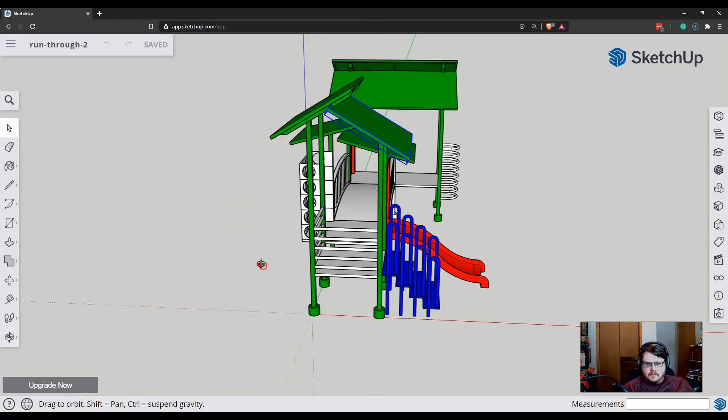This will be 3 or 4 videos, and we'll be building another playground equipment. This time there's quite a bit more detail, with some interesting new features and more detail underneath the roof. I hope you find this interesting.

Let's begin from the beginning. We'll create a new file, delete the helper person, and we'll call this Playground 2.

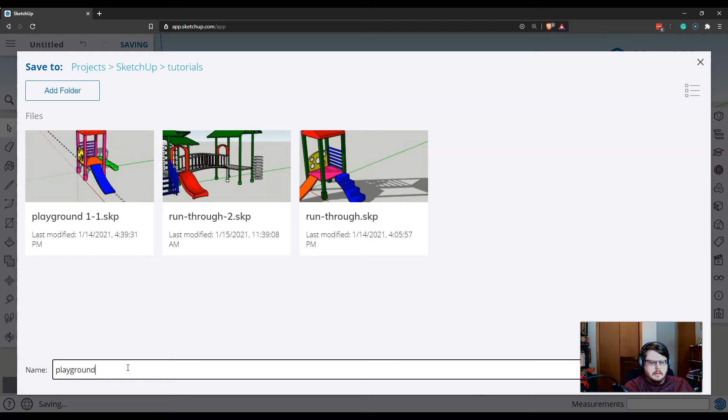I'm going to put 2-1 because I'm going to make multiple copies of this file.

Alright, to begin, remember that we like to make components of everything. So the whole idea, the whole philosophy behind SketchUp is to start with simple, primitive shapes and then build more complex geometry from them. So we'll start with a rectangle.

You just start at the origin, draw out till you see it, and we're going to make this 3 inches, comma 3 inches. In the bottom right hand corner you can see my measurement box, and I put 3, comma 3. Remember, our default unit is inches, so whenever you just type a number, it'll automatically assume it's inches.

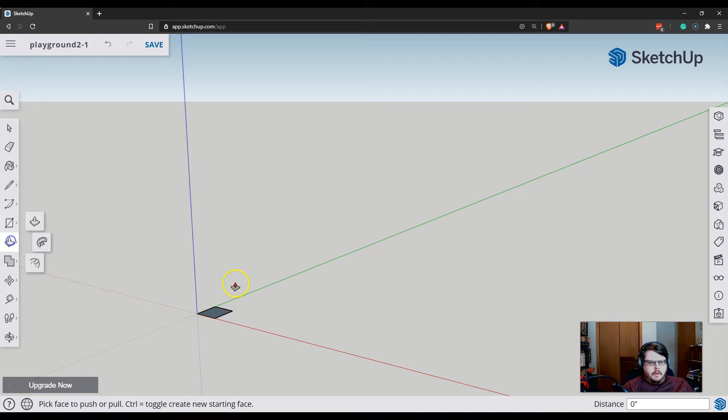We're going to take these pillars and extrude them out with the push-pull tool to 12 feet. These will be the pillars that form the playground.

Take the select tool, triple click this, right click it, and make it a component. We'll call it a pillar.

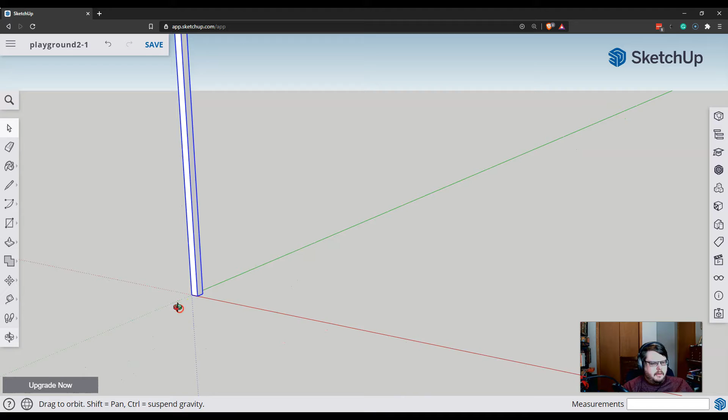Now we want to make these about 4 feet apart, so we'll grab one with the move tool. The hotkey for the move tool is M. The way I usually do this is with one hand on the mouse and one hand on the keyboard, hitting various hotkeys as I work, so I can swap between tools quickly. I'll click on this corner, start moving it on the red axis, then hit control so that it's duplicated, and type 4 apostrophe enter.

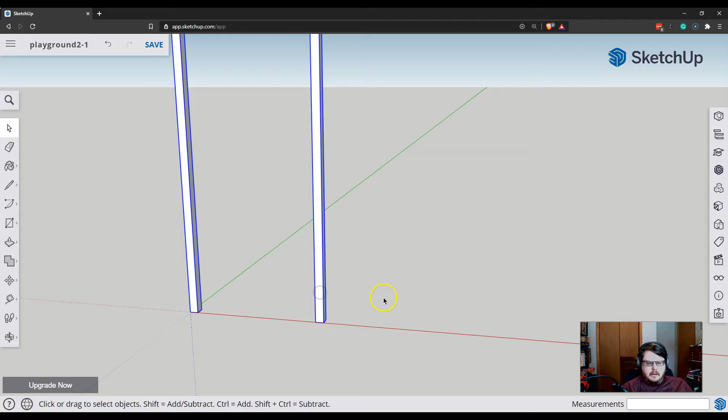Now we'll take that again, click it, select both of them, click on the move tool, click on the corner, start moving them both in the green axis, hit control to duplicate, and get 4 feet again. Then one final time: click it, move it in the green direction, hit control to duplicate, 4 feet. Now we have 6 columns with which to begin our playground.

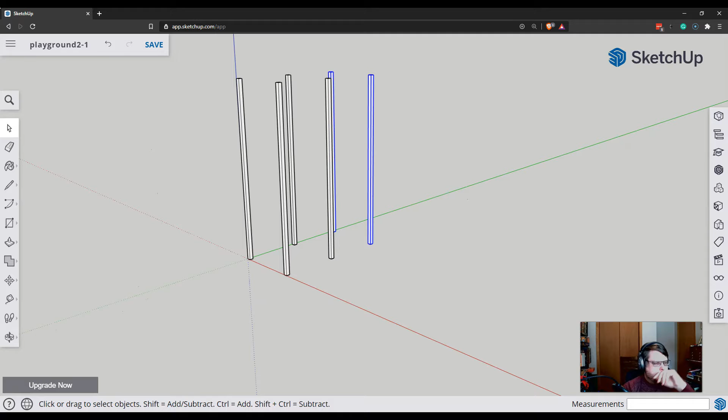Now the next part, we're going to build the platform. This will be very similar to what we did in the first one. You create a rectangle of any size underneath on the base, and then we'll push-pull it up 2 inches.

Then we will bring it up with the select tool, triple click it, and make it a component. We'll call it a platform.

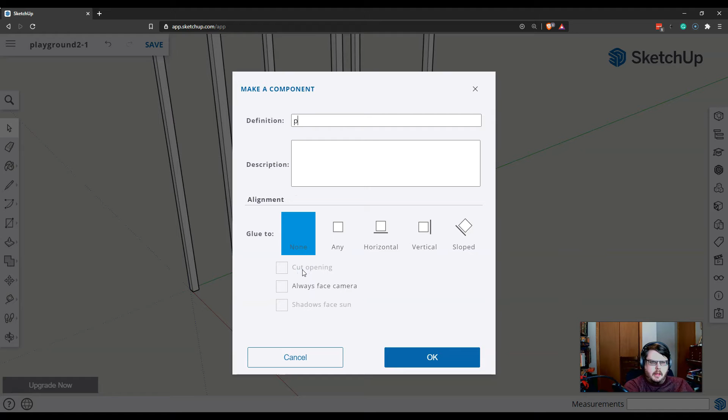We'll move it in the blue direction up 30 inches. You can use any dimensions you like, whatever makes sense to you. Your end result does not have to look exactly like what I'm creating, so you can use different results if you like.

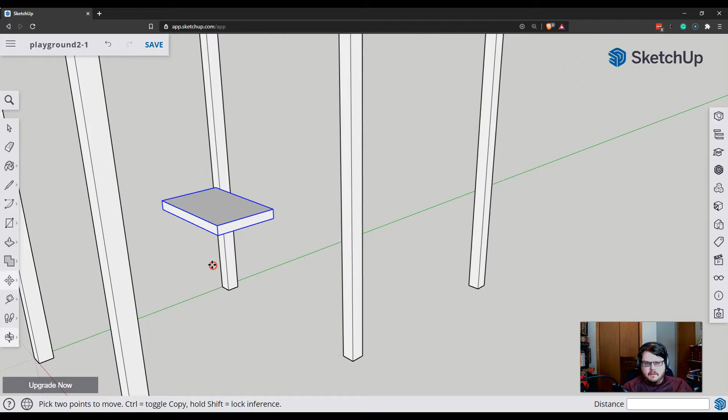It should have about the same level of detail though. So we'll grab the select tool and enter this component, the platform component. Notice how everything else kind of grays out. We'll use the push-pull tool to...

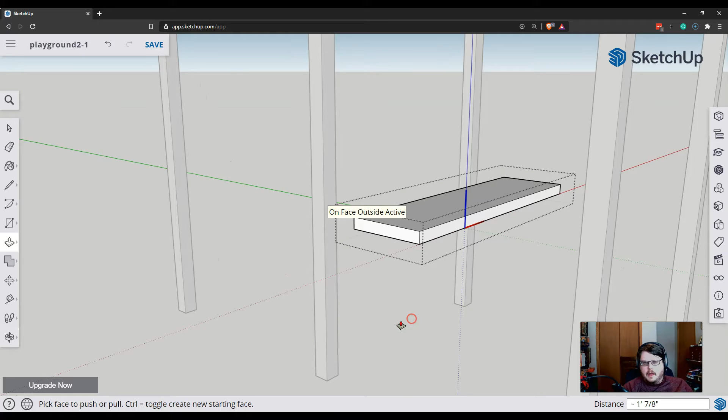Grab this edge and infer to the outside of this pillar, and then on the opposite face, once again, we'll do the same thing. For the other 2 faces, we'll push-pull but infer to the inside of the face. This is exactly like what we did in the last one. So infer to this side of the face, and that way, on this side...

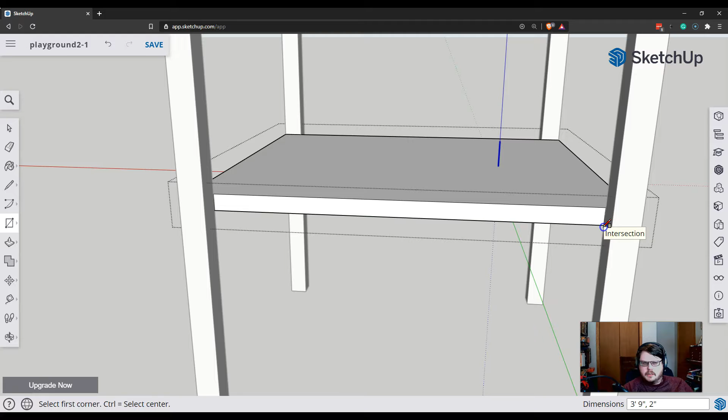When we cut out a chunk here, remember you could use lines, but that would be a 4-click operation. It's easier to take the rectangle tool, click on that intersection, drag over to this intersection, click, and then you'll have your new geometry. If I take the push-pull tool, you'll see that it cuts it away. And if I hide the rest of the model, you can see that those lines are there.

By the way, I'll show you how to hide the rest of the model here in another one. Actually, this is a good time to show it off. This is what I do.

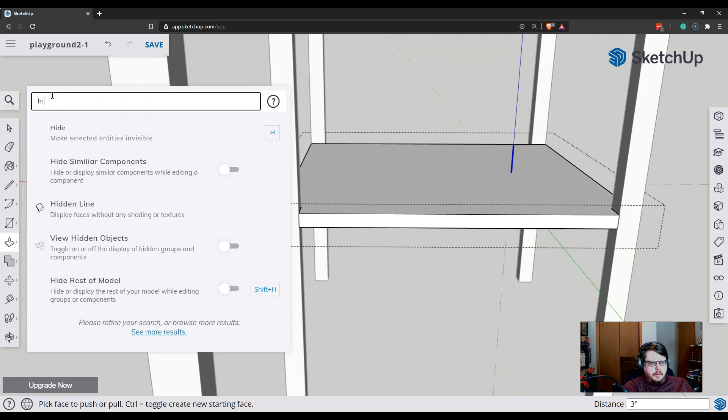With the search tool, I type the word hide, and you get a bunch of hide-related tools. This is what I do: I have H set to hide something that's selected, and Shift H to hide everything but what you're working on. So if you're in a component, you hit Shift H and it gets rid of everything.

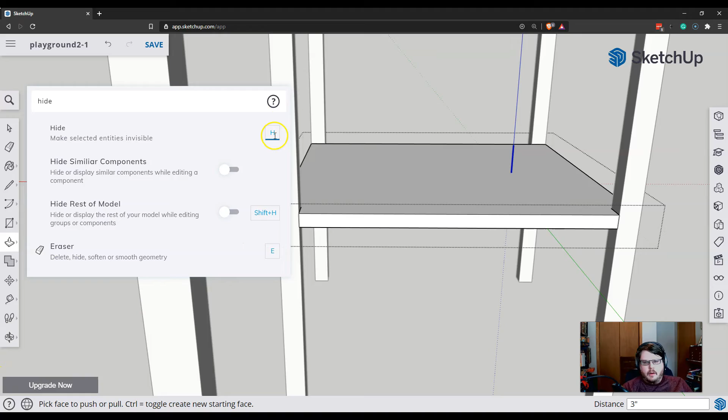You can change these shortcuts by clicking on these little boxes. I believe H is set to some other tool that you'd never click on or use, except automatically, like using the middle mouse button to orbit. I think it's set to one of those, so I always remap it to hide H and Shift H.

So you can do it here too—just hide and Shift hide. I have never actually used this feature, hide similar components. Not really sure what that's about.

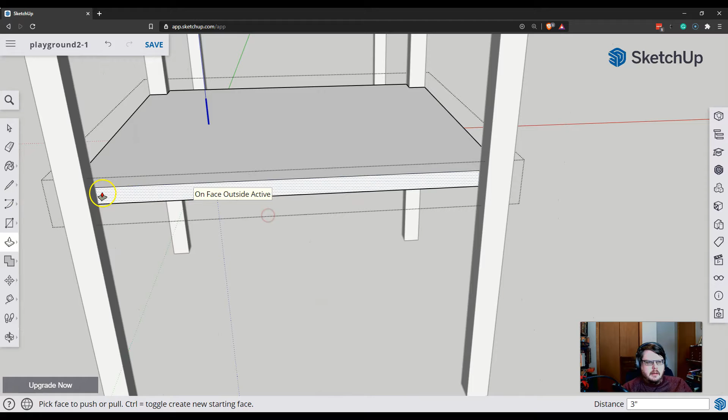We'll move around here to the other side. You need the other geometry there to do these inferences, but there we go. Push pull—P is the keyboard shortcut for push pull. If you ever want to know what a keyboard shortcut is, you can type push pull and you'll see that the shortcut is P.

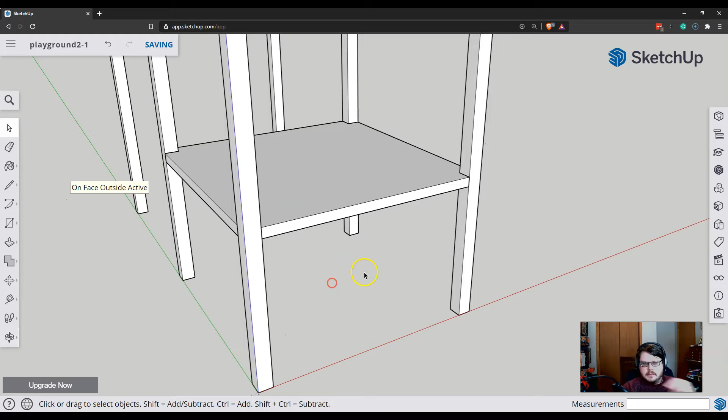The ability to map keys to the keyboard is actually a really new feature in the free version of SketchUp, and I'm quite pleased that they did it.

All right, moving along. So this is now a component—the platform is a component. Let's duplicate it.

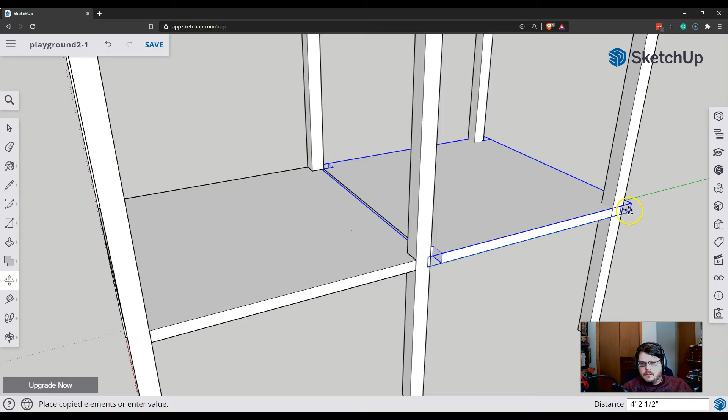Remember, when you're going to move stuff, you want to use logical inference points. Since it's already componentized, I'll grab it from this corner, start moving in the green direction, hit Control to duplicate it, and infer to the outside edge of that pillar. Then we'll grab it again and move it up in the blue direction, maybe about 6 inches.

Finally, we will add some feet to our pillars. We'll double click to get inside one of the components—everything else gets grayed out. Now we'll grab the circle tool. Check this out: if I mouse over this midpoint here for a couple seconds, and then mouse over this other midpoint for a couple seconds...

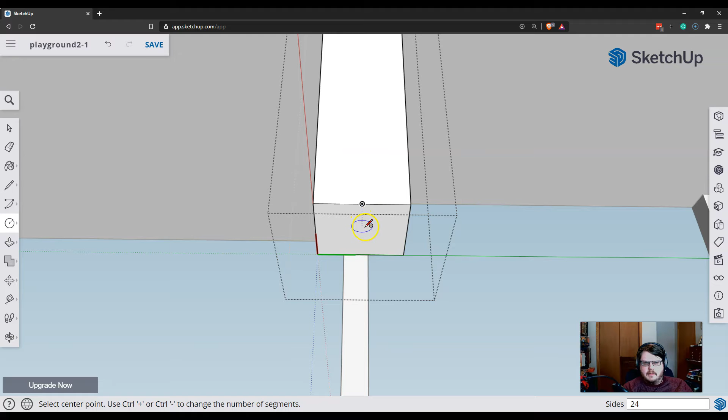It'll allow me to infer to both of them—or it did before. Kind of irritated that it's not working now. Alright, whatever, I'll use the tape measure.

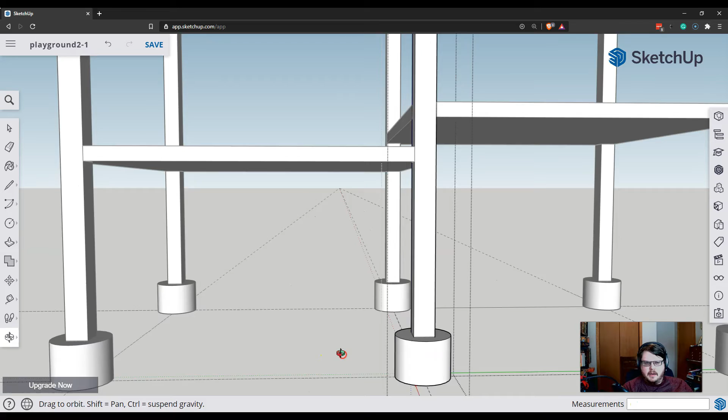We'll grab from here to here, and from here to here, and then we've got our midpoint. Circle tool, grab it, pull it out about 4 inches—a 4-inch circle radius. Push pull, and we'll push it up, say, 6 inches. You'll notice that since it's a component, it has propagated those changes to all of the other models.

Save and exit out of our thing. And we'll go back into the eyeglasses thing, delete all of our guides, and then close this up again.

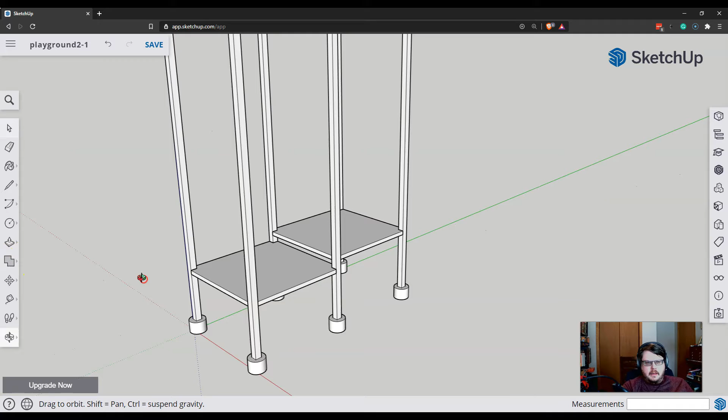All right, for the last part of this video, we will build our roof. It would be cool if we could build your roof in place, but I think it might be easier if we have a version of it out here that we can mess with, and then have the roofs sitting up here in their own space. So let's start right here.

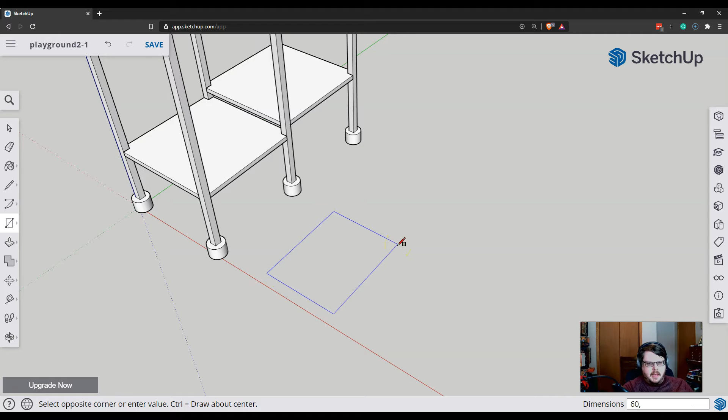Start with a rectangle—the rectangle tool is here—and we'll build the roof. We'll make it 60 inches by 80 inches. So a rectangle that's 60 by 80, and then we'll pull it up 2 inches with push pull. Then we'll make it a component: make component, roof. Now this is how we're going to make this really easy to do.

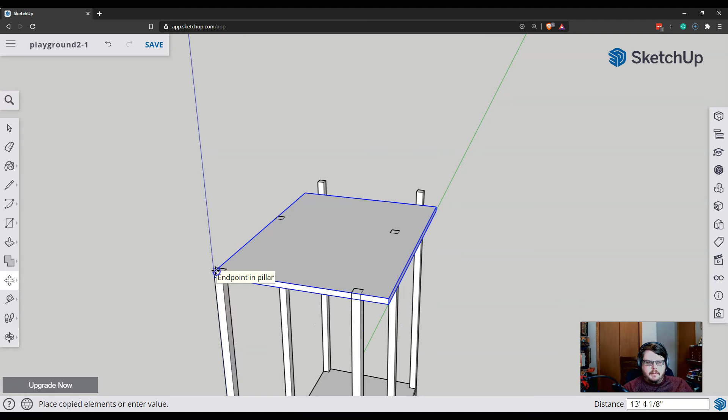We're going to pick it up and hit Control to duplicate it, then get it up on top of the roof. Now we're going to fine tune its positioning—pull it a little bit this way, pull it a little bit this way.

If you mouse over it, you'll find this little red plus sign right here, and you'll notice the protractor appears over here. That means you can rotate it by grabbing these handles. So if I click on that plus, I can rotate it up to a nice angle.

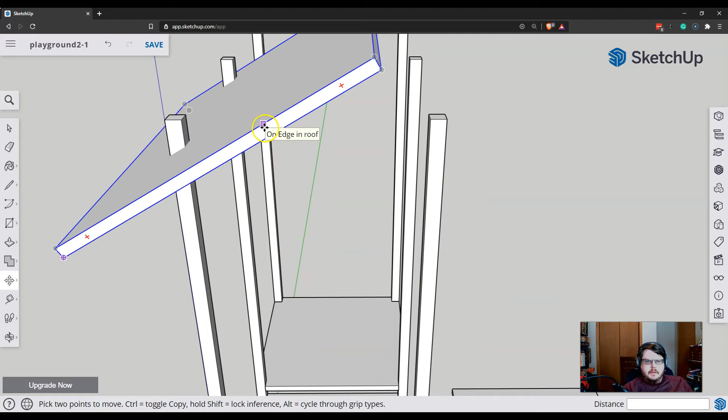Then we'll duplicate it again in this direction, in the red direction, and rotate this one around so it's kind of an opposite angle, then move it in the blue direction, move it down, and maybe out some more in the red direction. Try to keep it locked on the various axes.

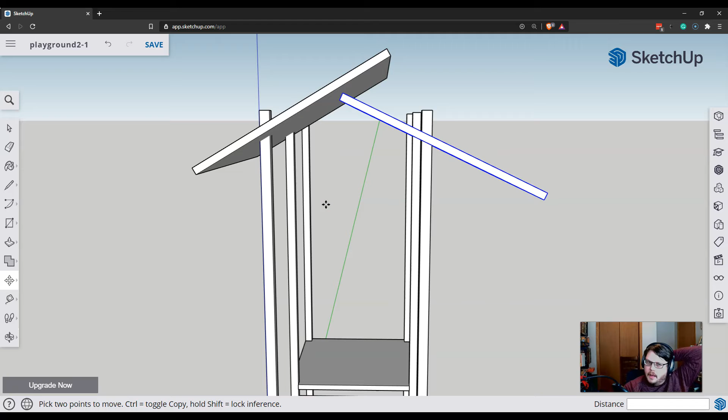Don't let it go off in some weird direction. If this line I'm dragging out here is black, that means you're going off in some weird random direction. So whenever you pick it up, if you accidentally move it randomly, undo that and remove it.

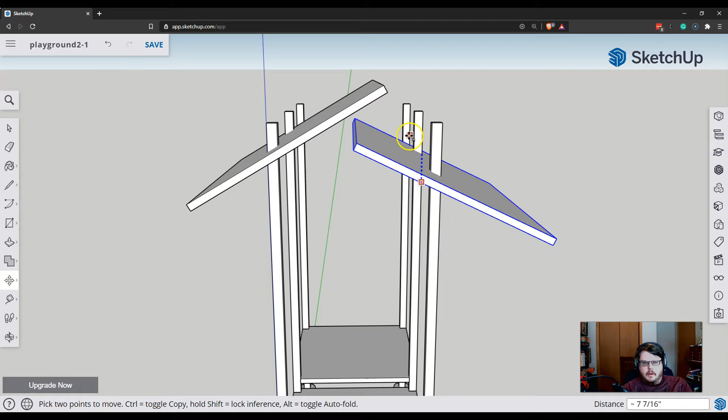You can always move it back into position by inferring to some other geometry. Let's move it down—wait, not down, let's move it in the red direction. Let's move this one down just a little bit more, and a little bit more. Boom, okay, so there's our two roofs, our first two roofs.

And now here's what we want to do.

So these are all components, and they're all going to be exactly the same. Don't worry if the posts are sticking out, that's by design, we'll fix that later. So let's edit this one.

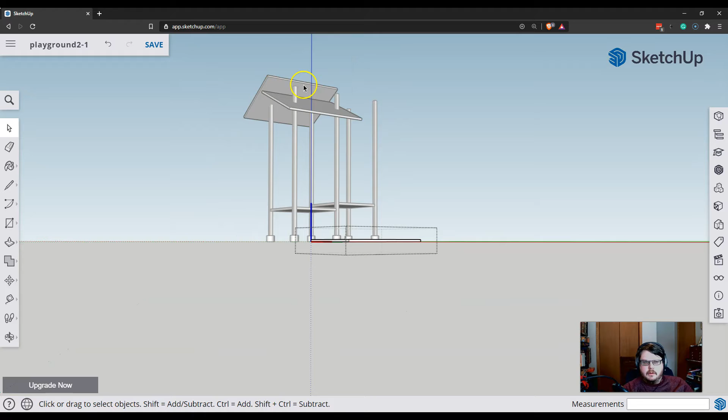First, triple click or double click to get into it, and we'll leave those ones up there. Now we want to add some support structures on them. It would be cool to work on the bottom side, but let's just flip it over so we don't have to worry about that.

So we'll use the rotate tool and rotate it about the blue axis, rotate it 180 degrees, and there we go.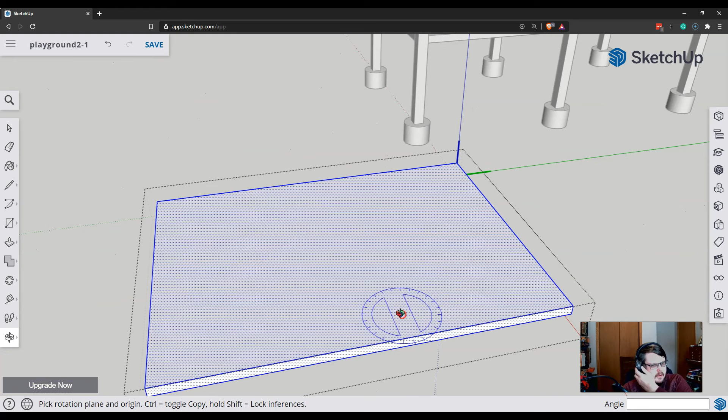And so we will edit the component, and do an offset on this bottom face. I flipped it over, we'll offset it inward by 2 inches, and you'll notice up there... oh, why did they move? Oh, I'm sorry, I messed up. Before we go in to edit it, then we want to flip it here.

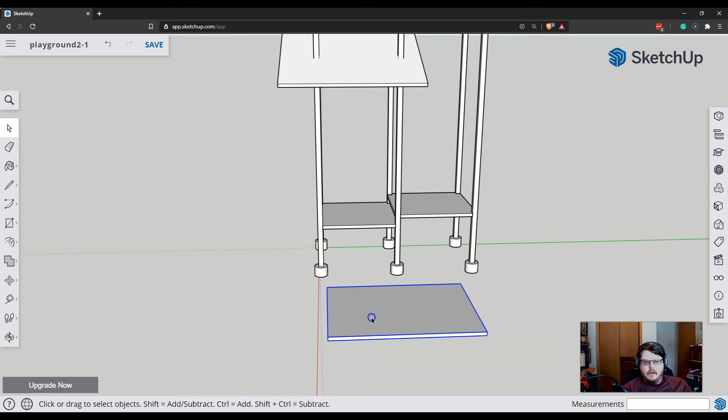So let's flip it around 180 degrees, and now go in and edit it. Because when you move it around here, it'll move up there. So when you're editing the component, you don't want to do any moving and stuff, you want to move the component as a whole, rotate it, and get to the bottom side of it.

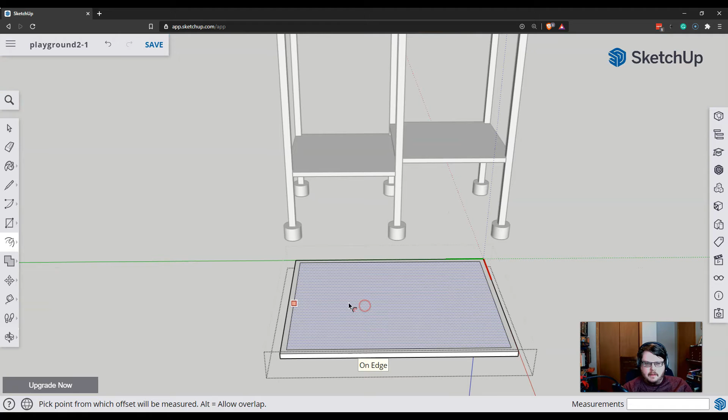Okay, so let's do our offset here, a 2-inch offset, and you'll notice that offset is on the inside of these ones as well. And then here we will push-pull that down 1 inch, which is about half the thickness of this thing.

And then we'll add like a center structural detail here, and we can do this really simply with the tape measure. Make sure you're inferring to this inside edge here, and then we'll find the midpoint on this line, which is going to be right there.

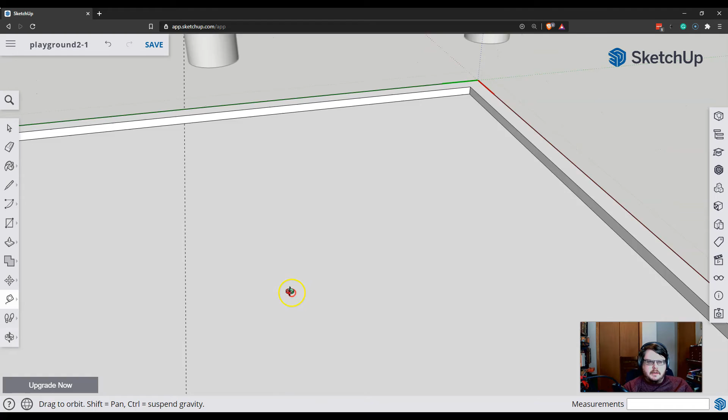Boom. And so we want it to be 2 inches wide, so we'll pull a line out here, 1 inch, and then a line out here, 2 inches. So there it is. The middle line was just to find that center point, and then we draw the other two. It's sort of how you would measure out to get a layout for hanging a picture or something like that.

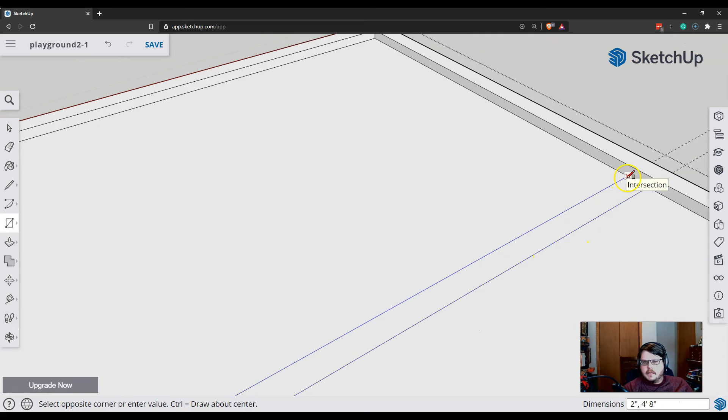So we'll draw like a rectangle or a couple of lines. You can do this with a pencil tool or with a rectangle tool to create that. We'll push-pull that up, and then infer to this edge.

And then I'm going to clean up the geometry by healing these lines right here with the eraser. So there it is. And if we look up at our other roofs, you'll see that same geometry has been added. Let's add one more little extra piece of geometry that's kind of fun, makes a little extra visual appeal.

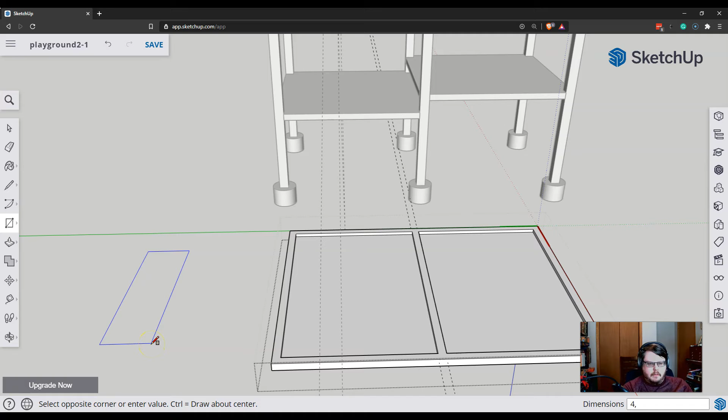We'll start out here. We'll create a rectangle that's like 4 inches by, I don't know, 36 inches, something like that. Undo, I'll do it this way. Whoops. Oh, by the way, if you're drawing a rectangle and you hit the Control key, it actually changes what it's drawing from.

So normally I'm drawing from one corner to another. If I hit the Control key, it'll actually start drawing from the middle. Notice how it's now pulling from the middle? And 99% of the time, that is not the behavior you want. I don't know why anyone would do that, but it's usually not how I want things.

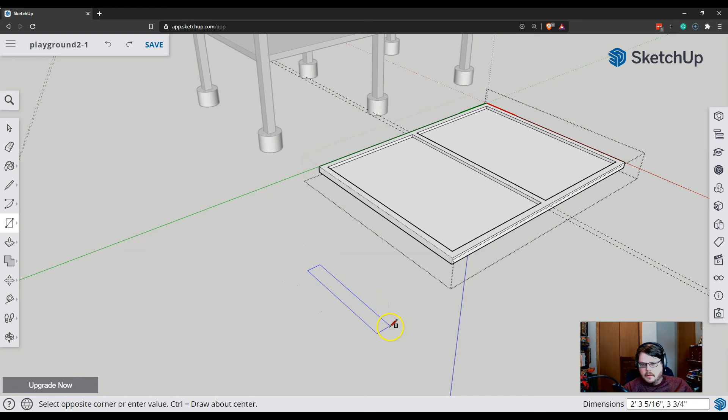So we'll do 36 by 4 inches. And then we'll pull it up 4 inches. So we just want a 4-inch by 4-inch beam that we'll use as a structure.

Now check this out. We're going to triple click this and make this a component within your roof component. So make it a component, we'll call it a beam. And now this is a component inside of that.

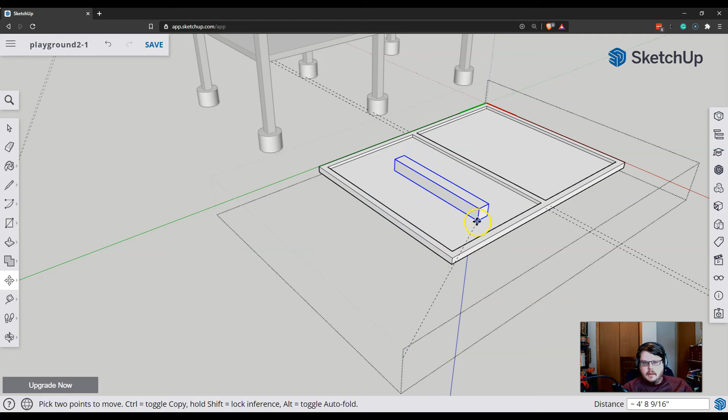We're just going to move it into this so that it's on this surface, and then move it so that it's on this edge, and then we'll go into it with the select tool, double click it so that you're editing it, and then we'll pull this face so that it is on this outside edge right here. Boom, right there. So that's kind of nestled in there.

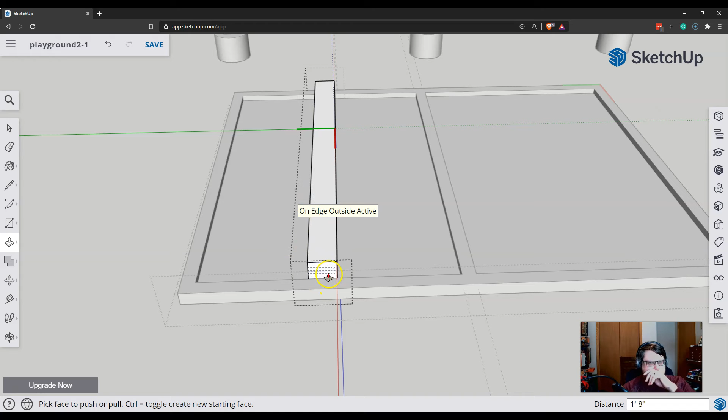Don't worry about the placement because we're going to deal with that up top when we go back upstairs to look at the other 2 roofs.

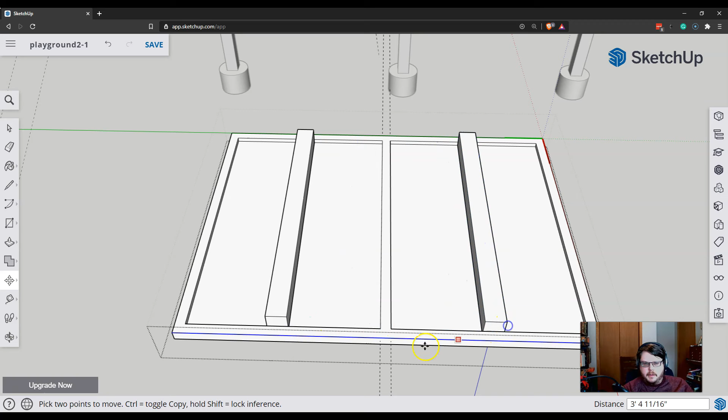We'll grab this and escape out. We'll grab it, move it, and then move it over a little bit and place it somewhere in there. Let's add a little bit more detail to this thing.

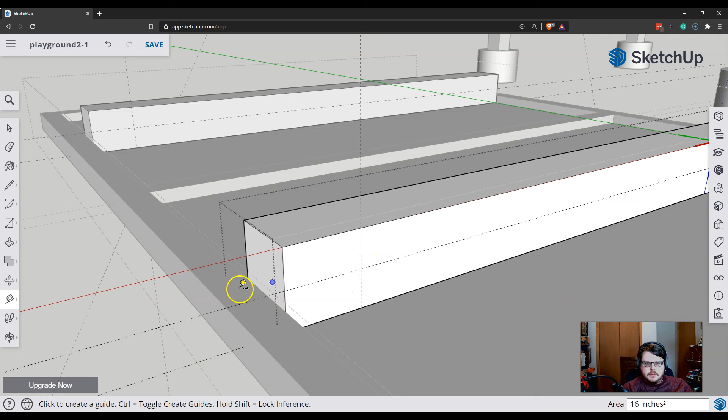We'll grab it, edit one of them, and grab the tape measure. We'll measure down 2 inches, so it's halfway. Measure in 4 inches, down 2 inches, and then we'll make a little cut here.

Just draw a line from here to here, and then we can take the push-pull tool to push that across. Notice how it cut it out over here too, so it makes like a little bevel on there. We can do the same thing over here.

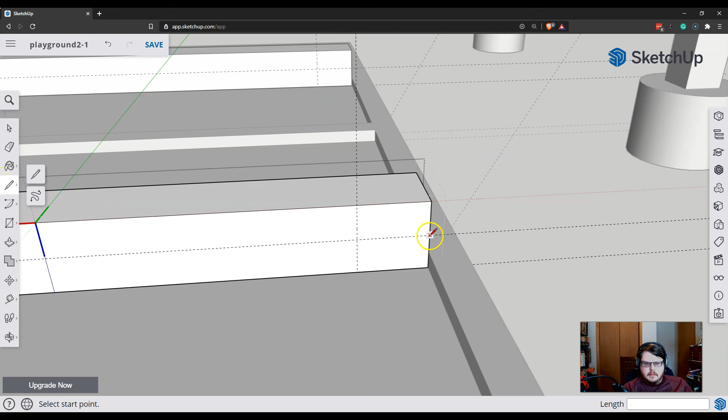You want to take your tape measure, measure in about 4 inches, take a pencil, draw that line, push-pull, and then push it all the way to the back, and it'll disappear. You're just cutting away everything that's not part of this beam.

Grab this, click out, and then click out again. Notice how I have all these guidelines. We'll go in here and delete all guides.

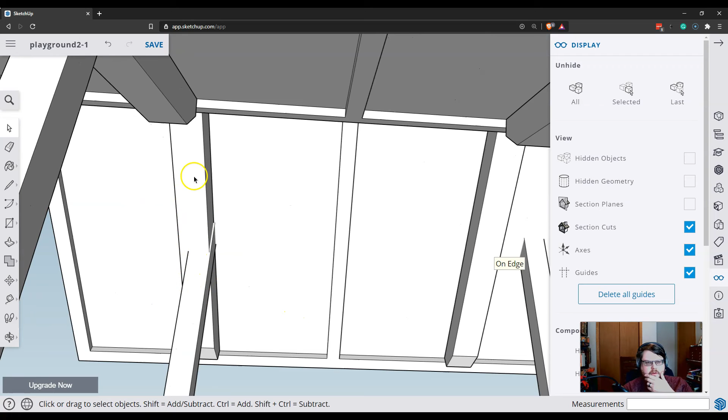Now let's pop up here and take a peek underneath here. We want these supports to be centered on these columns, so this is where we want to work up here. Let's get rid of you for a second.

Let's double click to get inside of this, and then we'll select one of these. Now I can move it back and forth, and it'll kind of line up with the other one. Let's try this. There's a couple of ways that we can do this. Since we know how thick this column is, it's 3 inches, I can grab it on this edge.

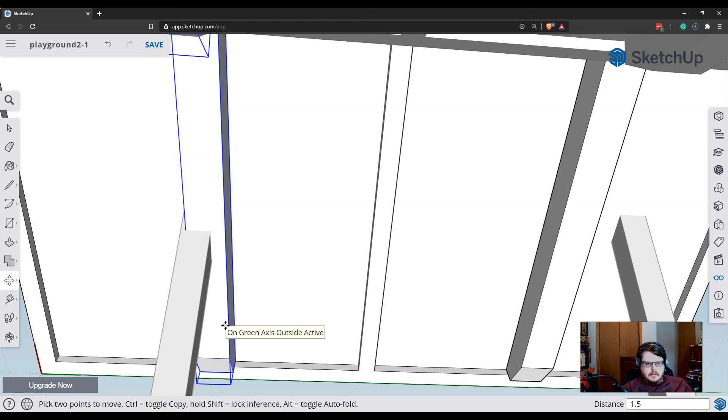Get it locked in the green axis by getting it on the green axis and then holding shift, and then I can infer to this edge. Once it's there, I can just grab it again, move it into the green axis and say 1.5 inches. Aren't those 3 inches? 1.5? That's weird. Or it'd be 1 inch.

It would be half an inch. We move it over 0.5. Then it's centered on the column.

The other way that I can do this is grab this, and to get it centered on this guy, we will start by grabbing it by like the midpoint here on this beam. And then we want to infer to somehow get to the midpoint of this geometry.

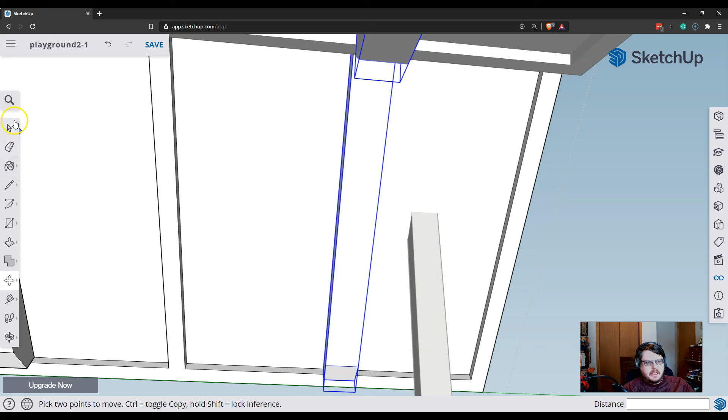Now, in order to do this, we actually can go into X-ray mode. I'm going to go here, click on the search tool, and type X for X-ray. This one I actually set X-ray mode to the hotkey X because it's useful. So we'll turn on X-ray mode.

Then we'll grab this midpoint and start moving it in the green axis, then hold shift to lock it in the green axis, and then kind of mouse over the top of that pillar right there.

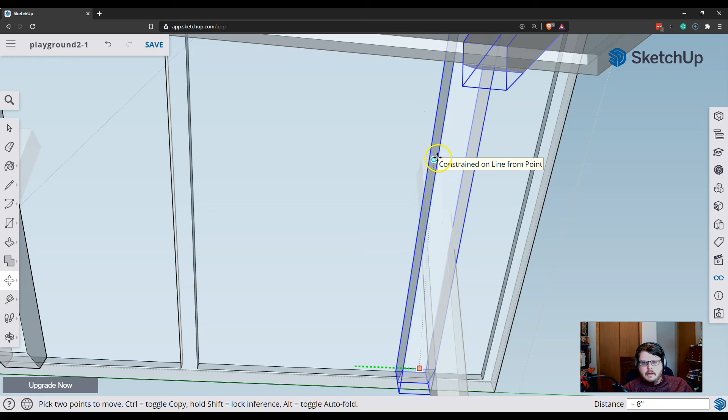I think I need a slightly different angle to do this correctly. So we'll grab this midpoint, get it on the green, hold shift, and then I want to infer to the top of that pillar. And it's not working here.

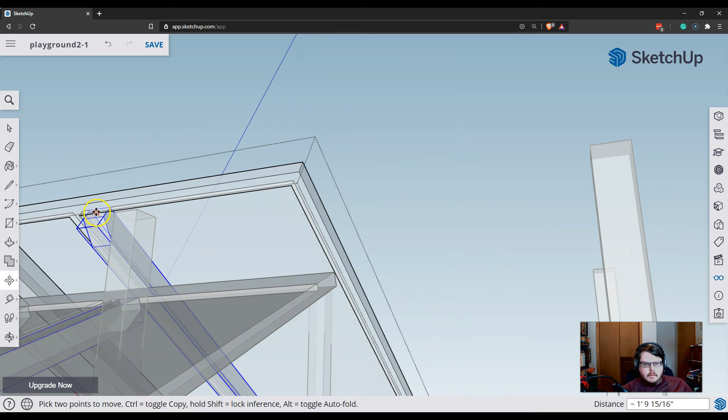And turn off X-ray mode by clicking X, or going into here and turning it off. So just to change it to X, you just click on this and hit X, and then it works just fine.

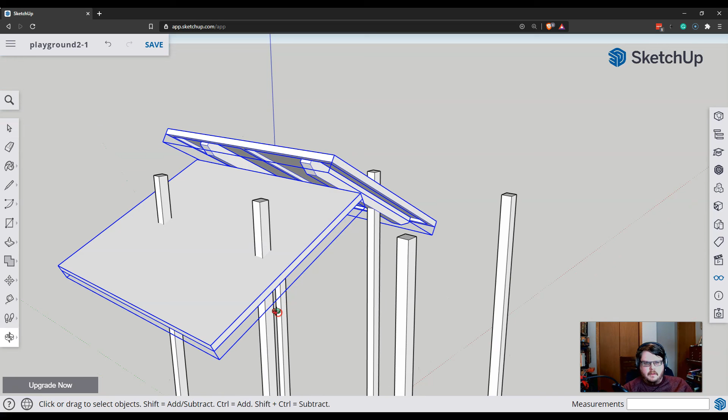All right, we'll do one last thing here just for fun. We'll escape out so that we're on this, and then we're going to take both of these two things and duplicate them over a little bit. Start moving them in the green axis, hit Control, and then get them kind of centered over this other roof.

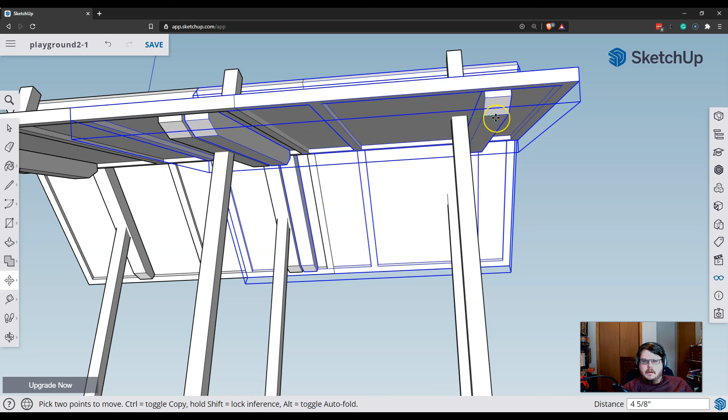And you can take that midpoint and get it moving in the green axis, and then hold Shift, and then infer to that middle so that you get them centered over the beams again. And then once again, we'll take this and start dragging it down on the blue axis so they're not overlapping.

And then you might want to play around with the rotation on these a little bit. So maybe tilt this one, angle this one down a little bit, angle this one down a little bit, and then call that good.

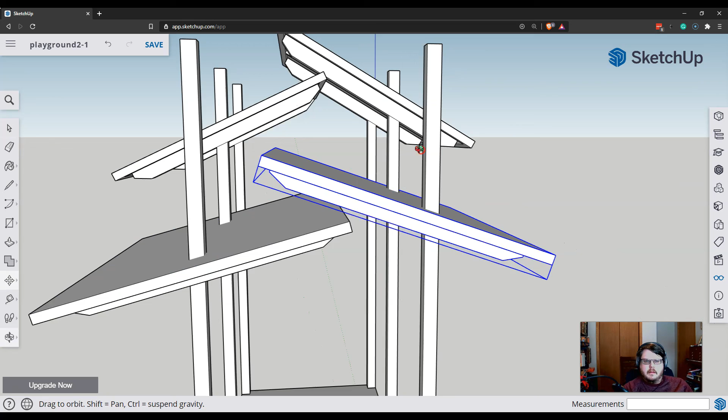All right, so there we have it, our beginning geometry for this tutorial. I'll delete that reference roof line, and then we'll call that good. We'll see you in the next video.